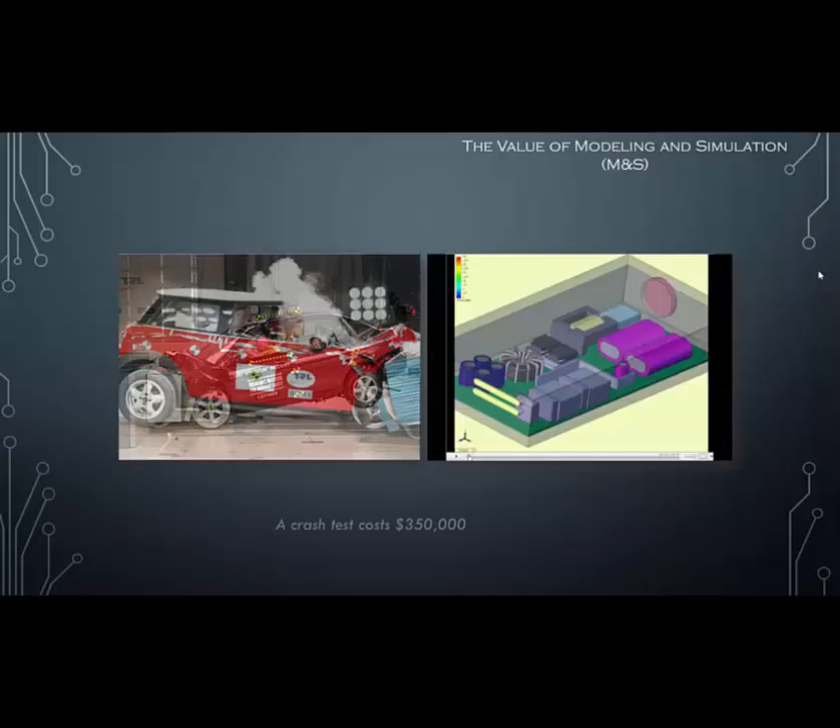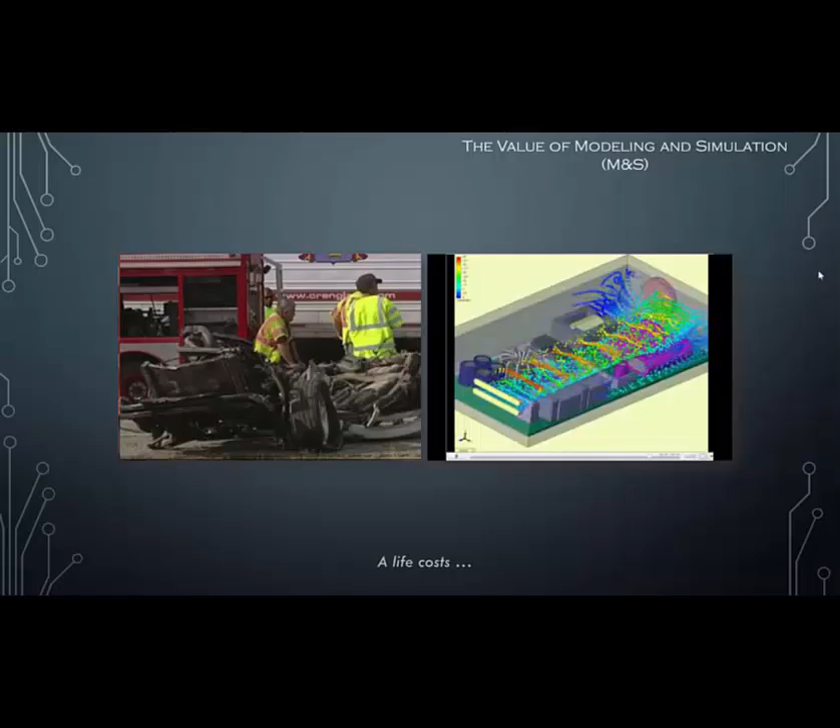And this applies to any kind of scenario, whether it be electromechanical, thermal, automotive, biomedical, or anything else. We want the ability to run trade-off analyses and vary parameters and see what happens.

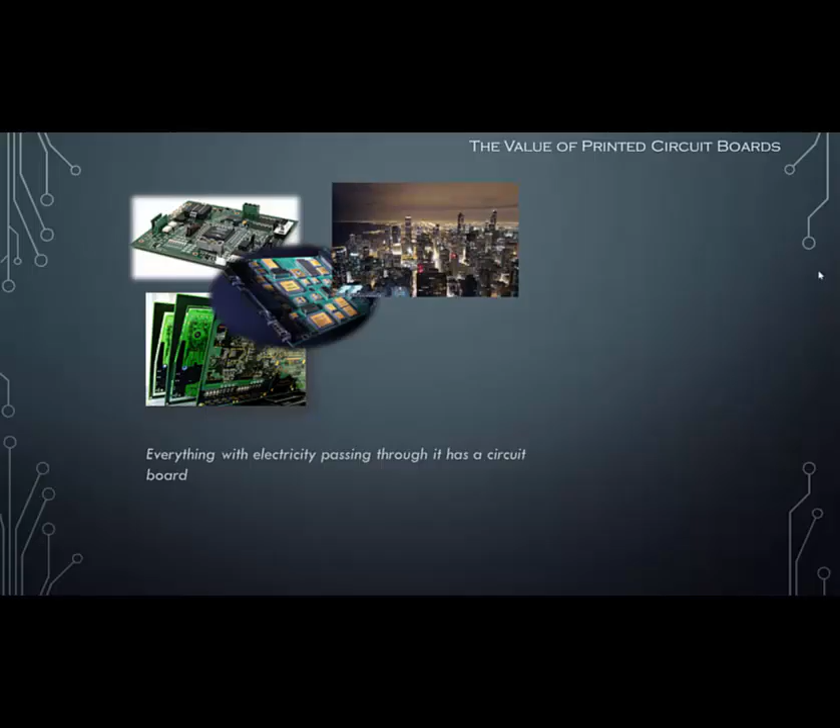Specifically with regards to electromechanical systems, anything with electricity running through it has a printed circuit board, so the market is very large, applications are broad, and often failure is not an option because you need very high reliability.

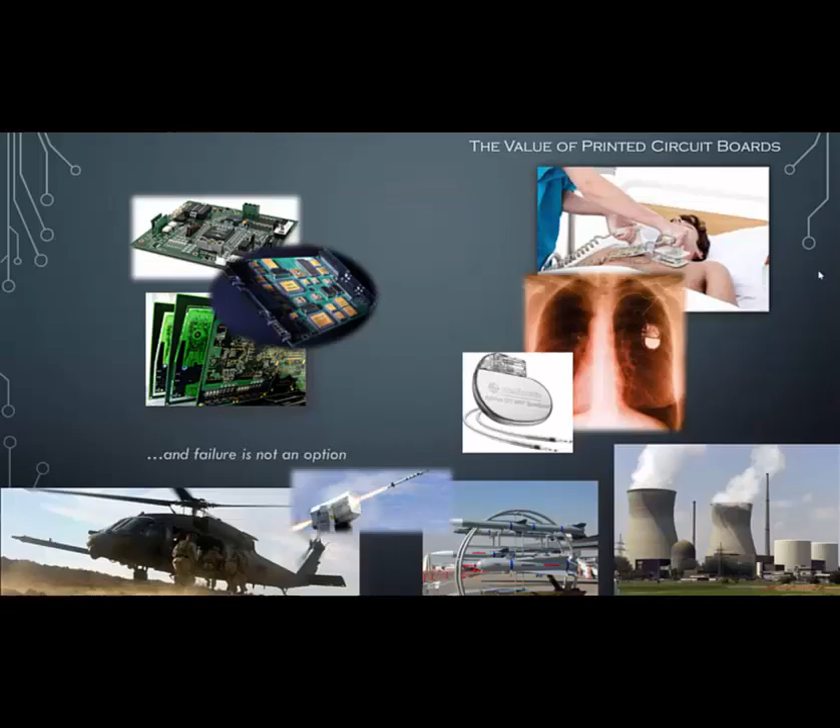In terms of use cases, $1 billion, anecdotally, is about what Microsoft spent on warranty costs for the Xbox because a small piece overheated due to a lack of communication with development partners.

In many large companies, you can have one person work on mechanical analysis, another electrical, another data processes, another thermal, and there's very little communication in terms of file formats or software packages. We want to solve those kinds of problems.

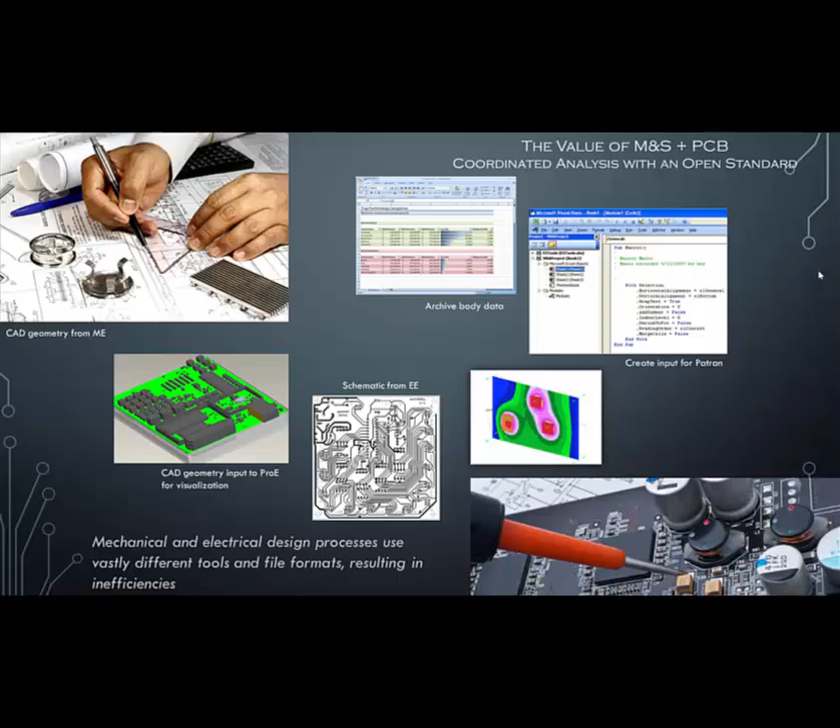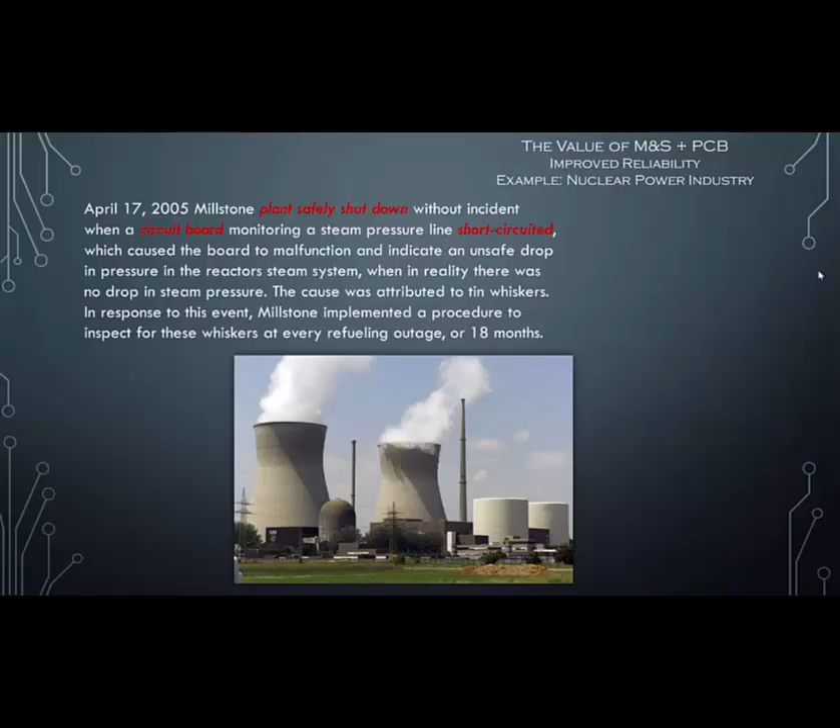In the nuclear industry, you can have circuit cards that are 20, 30 years old, and when they fail, there can be significant repercussions. So we're interested in developing capabilities that allow us to automatically reverse engineer those circuit boards, then virtually analyze them for reliability issues, so that if there is a problem, we can see it on the computer before we see it in the real world, and then we can address those issues.

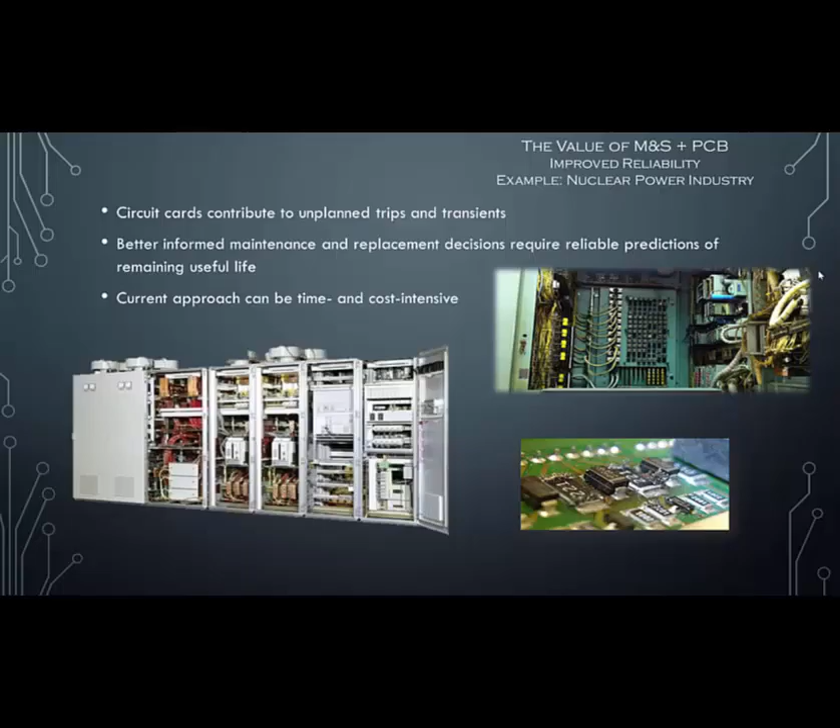The kinds of issues and the market and the problems that we want to solve are not just technical, but financial as well. Our hypothesis is that if we can provide a system integration software package that helps aggregate this data and these analyses, then through modeling and simulation we can solve those problems. We do it on 3 levels: analysis and testing, data, and visualization. That's what virtual system engineering targets, and that's what Preview does in general.

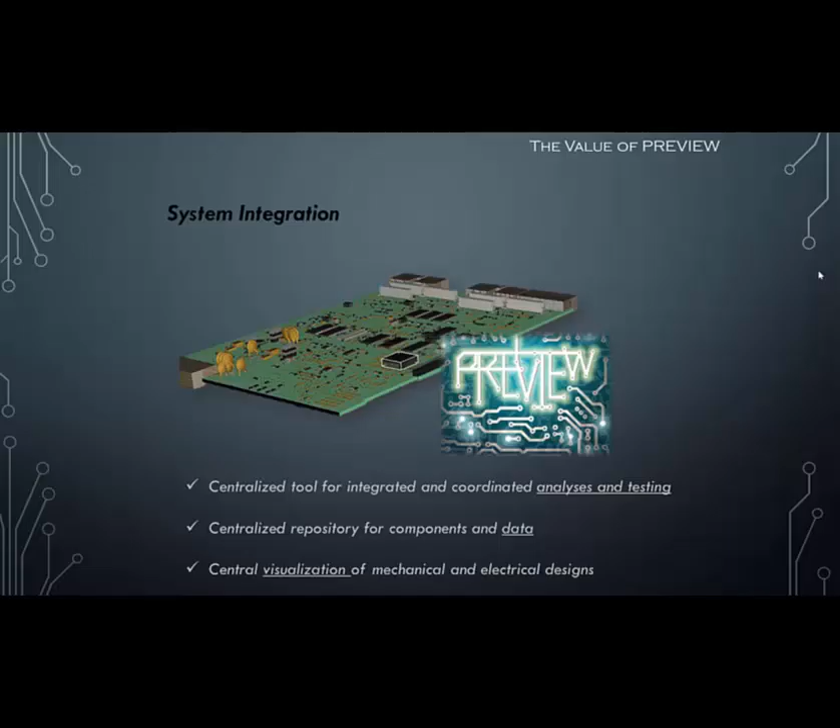Now we'll talk a little bit about capabilities for network traversal. The foundational capabilities for Preview involve visualization and manipulation of printed circuit cards in the various layers. One of the nice advantages is the ability to traverse networks on complex multi-layer boards, and that's what you're seeing here - the ability to highlight connectivity, contact different traces, different pads, and see how they coordinate throughout various layers.

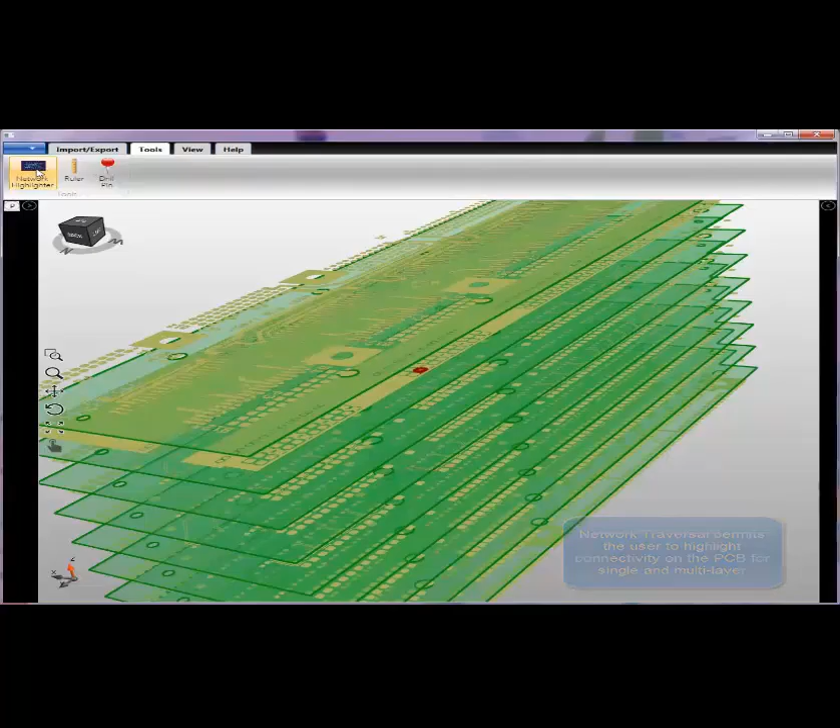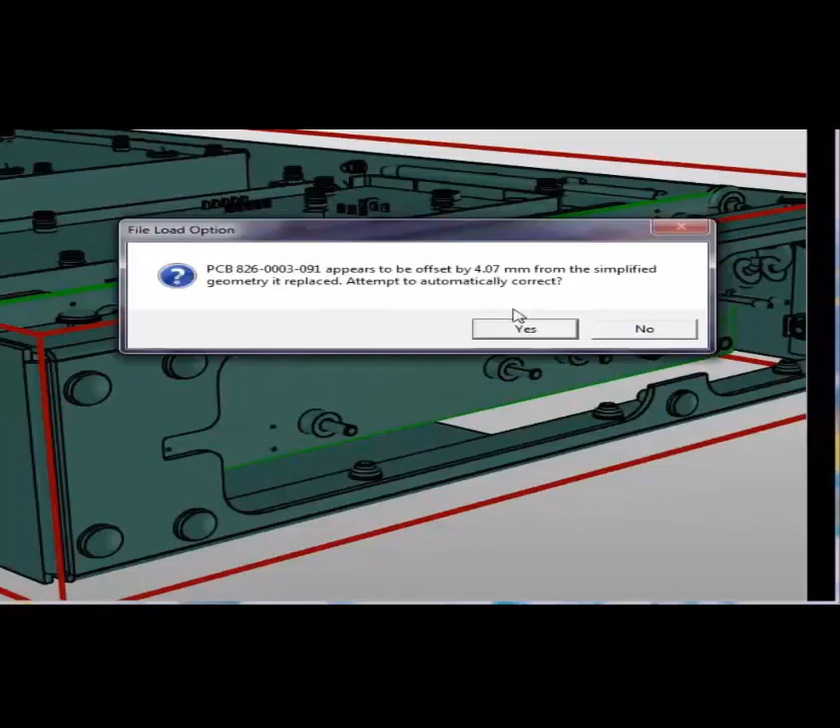We can also do what we call geometric analysis. This is essentially the comparison of MCAD, mechanical CAD, and ECAD, electrical CAD, where we automatically detect mismatches in this regard on the board level and on the pin level. We can do this for single boards or for multi-boards as well.

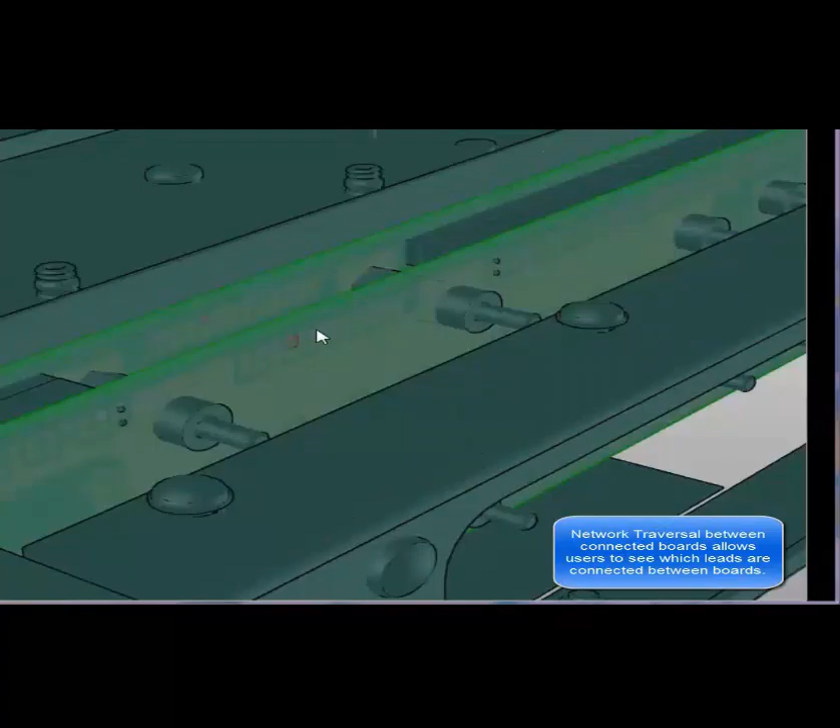Here you're seeing a case where the board was misaligned with the mechanical package. We automatically find that and allow the user to correct that issue simply by selecting a toggle. You also have the ability, another example here, to see network traversal between multiple boards, which is a unique capability.

This is the second example where you see in the schematic that the 0 point for the board is actually in a different place than the 0 point for the mechanical schematic. And it's very hard to detect this simply by looking at the drawings.

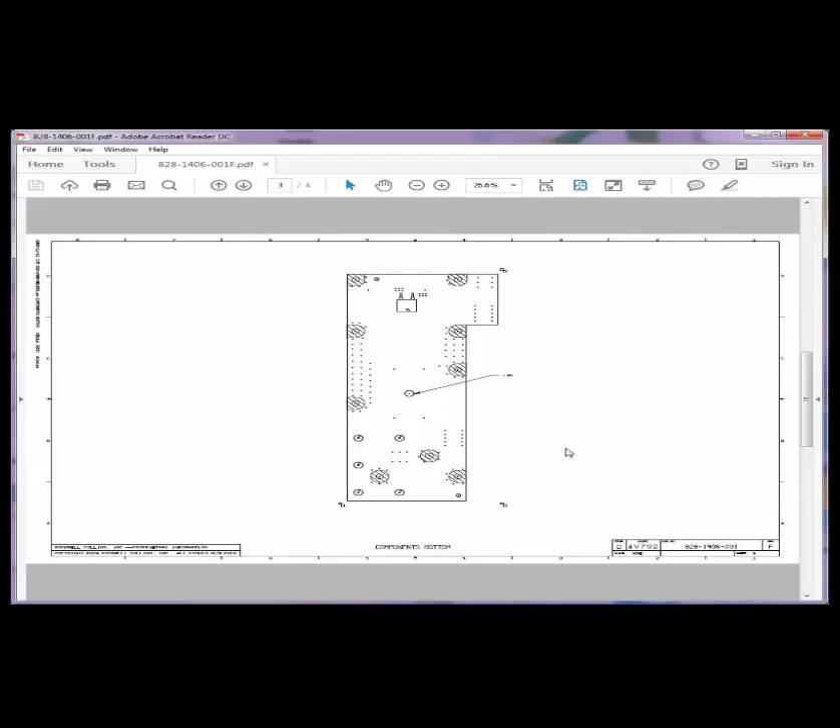However, it shows up immediately in a 3D visualization package like this using geometric analysis. Again, we automatically detect this. You can see that this offset is indicated by that white dot showing the 0 point. And we can again allow the user to correct this.

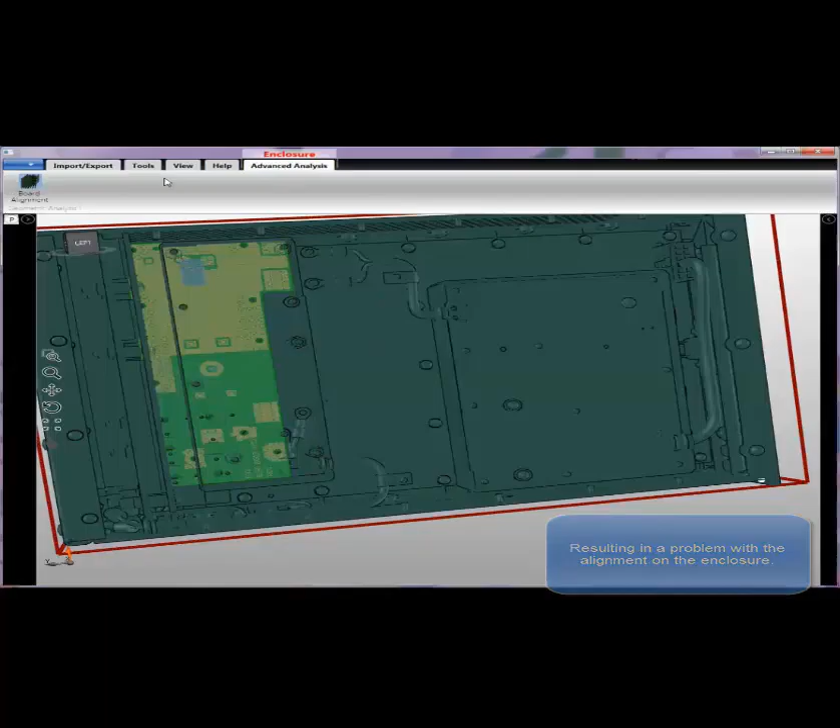We can do the same thing in terms of pin mismatch with components. We've automatically detected pins that are essentially open - they're not connected to the components.

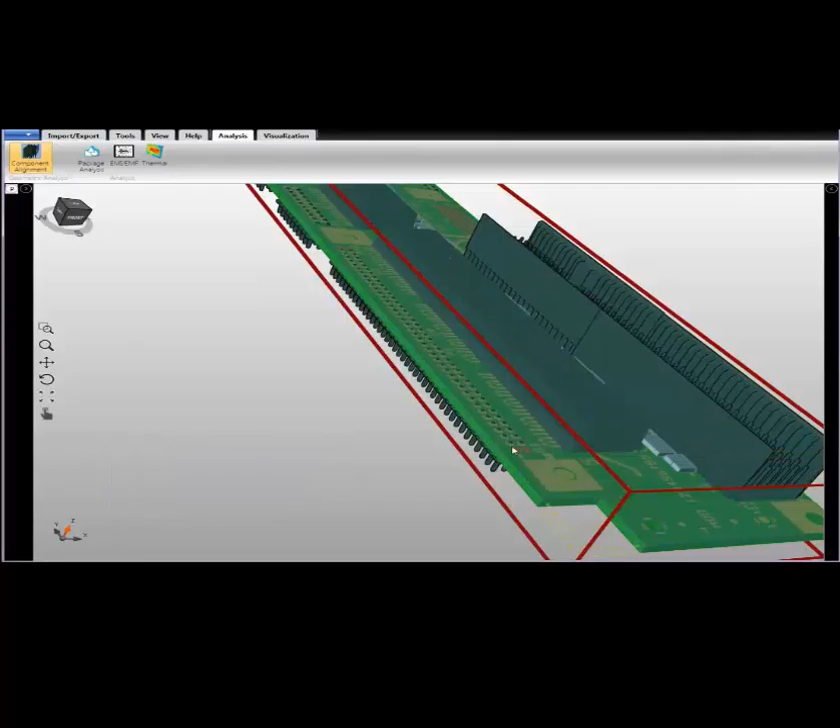Now what you can do is leverage our underlying component library, find the proper component, select that component, and just within the library manipulate it, visualize it, see what that component looks like, load it into the board. It automatically gets positioned in the proper place. And again, this mismatch between ECAD and MCAD, in this case traces, has been corrected.

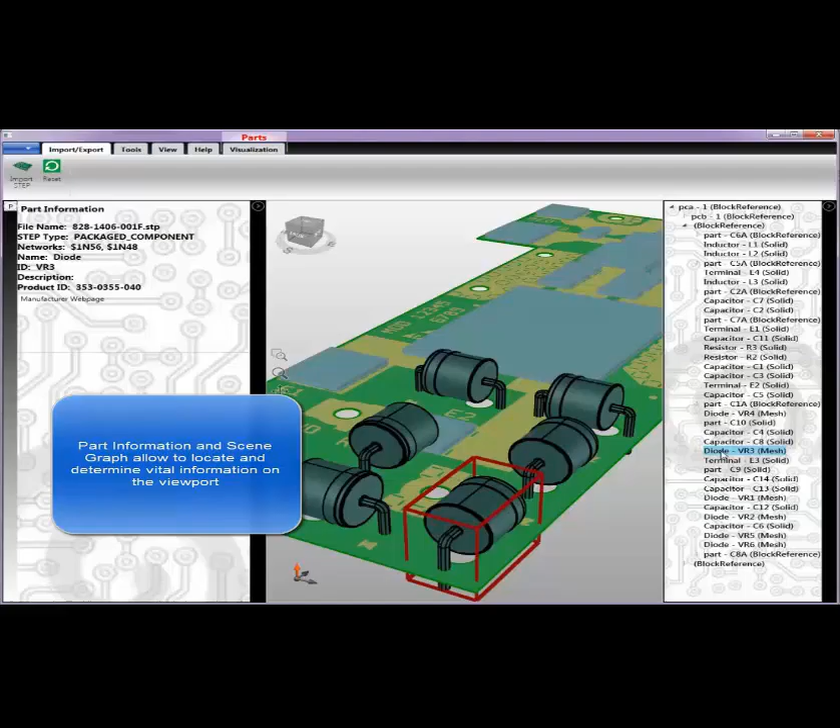We'll now talk a little bit about the ability to coordinate component data. What you see here on the right is what's called an open scene graph. It gives you a verbal and structural relationship between the different components that you see in the scene. So we coordinate between the visual aspect and the label on the right, and how that's parented to different geometric structures.

Concurrently, as you select a component, whether you select it visually or select its title on the far right, on the left you'll see all the information about that component.

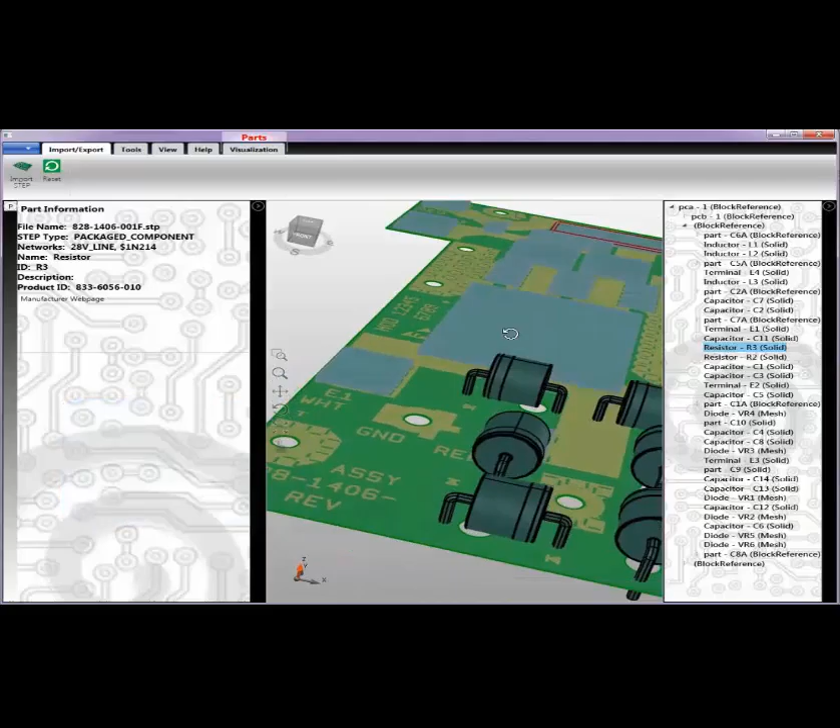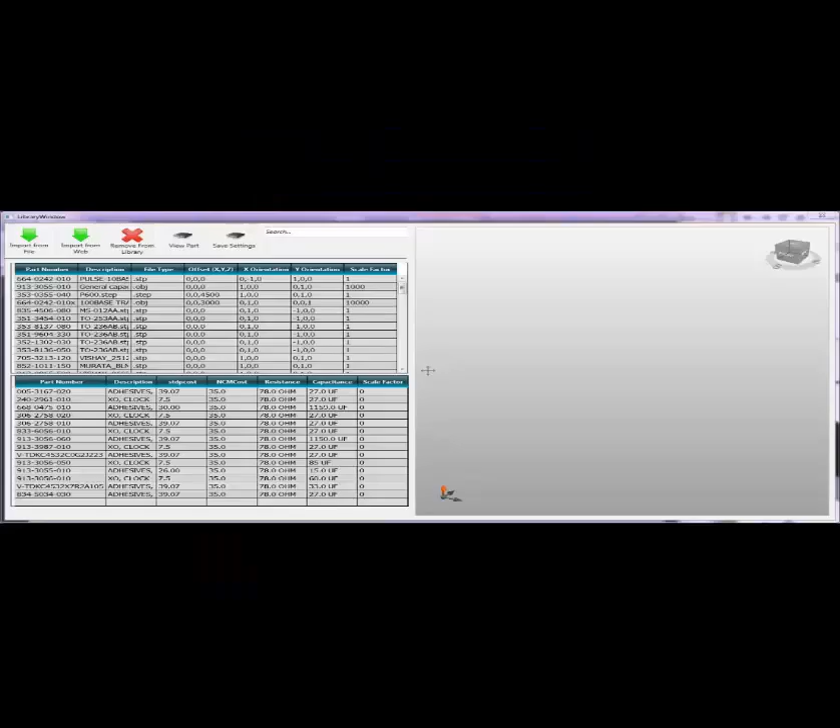Then, given that kind of database of component information and visual models, what we can do is scrape the web, scrape manufacturer web pages to extract their information and their components that are publicly available, and we can do that on a regular basis.

And here you're seeing the process you would go through to load in a new part. This can be automated, so it happens every week, every night. And then those components are stored within our library and can be used to replace components that may not meet necessary requirements.

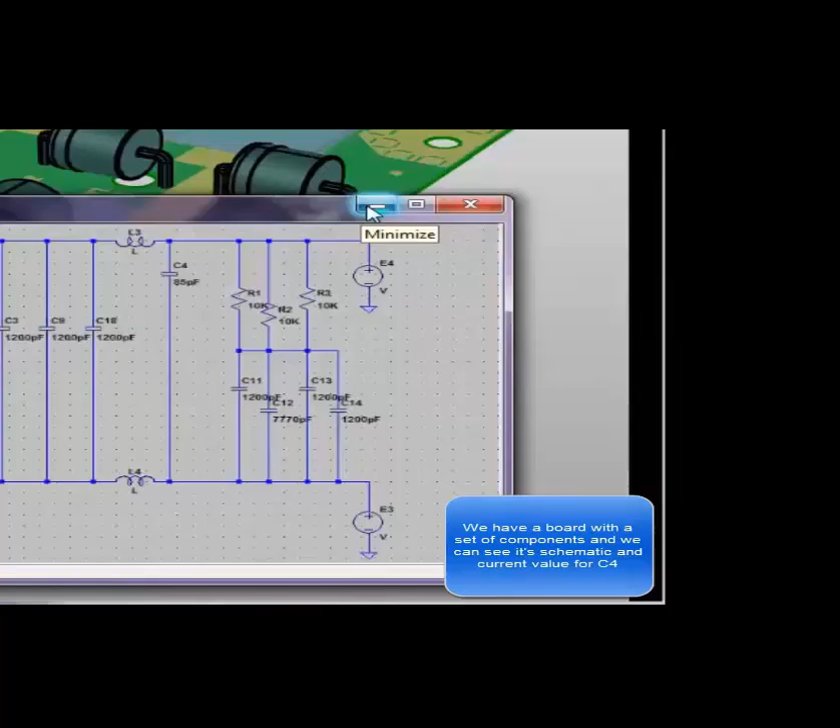So now, given the ability to visualize circuit cards, coordinate data, and coordinate component geometry, we're going to look at new capabilities for virtual test, where, as you've seen, we're able to create and display the schematic for a board. We can look at the performance of that board and plot that in various capacities, and in this example, we're not meeting a requirement.

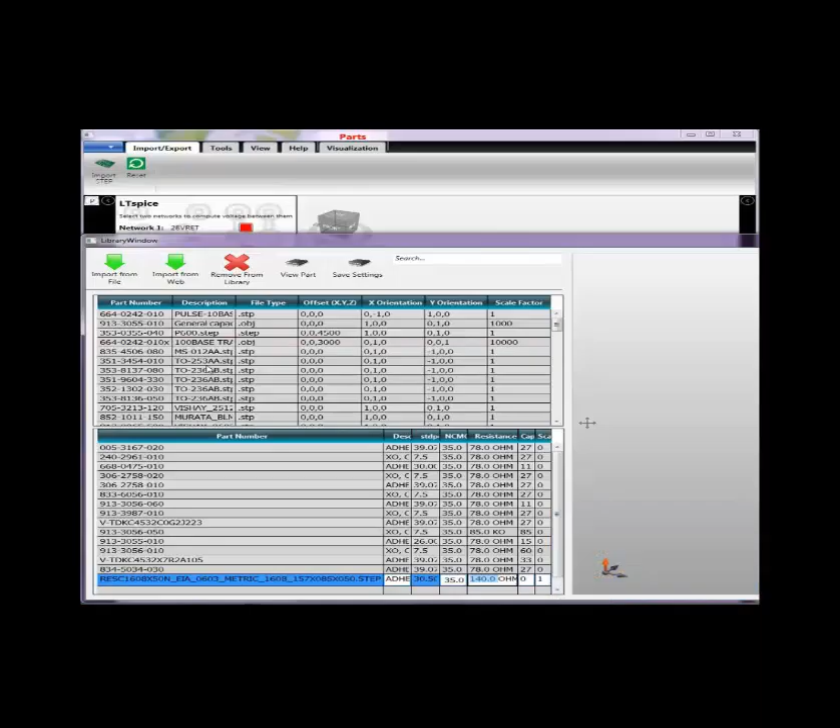So we can go into the library, find that part that we previously scraped off the web or obtained from a manufacturer, possibly a new component, load that into the board, and then we can rerun this analysis.

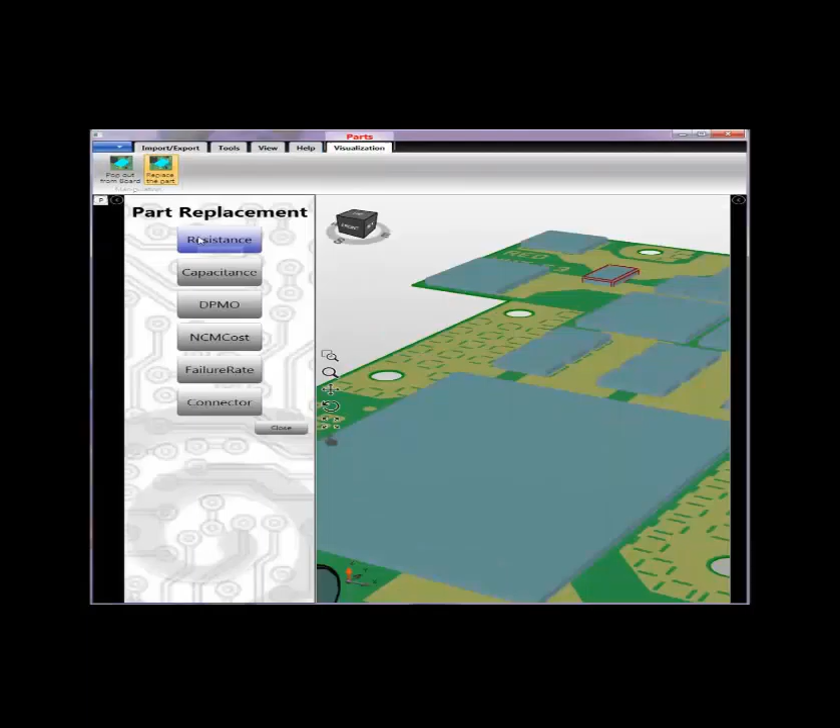We can see the update to the schematic file and how things have changed, and we can see the change in the part data, the part name, and then see how the performance changes.

So we reloaded the components, and you'll see that the details of that schematic have changed in terms of that component's characteristics.

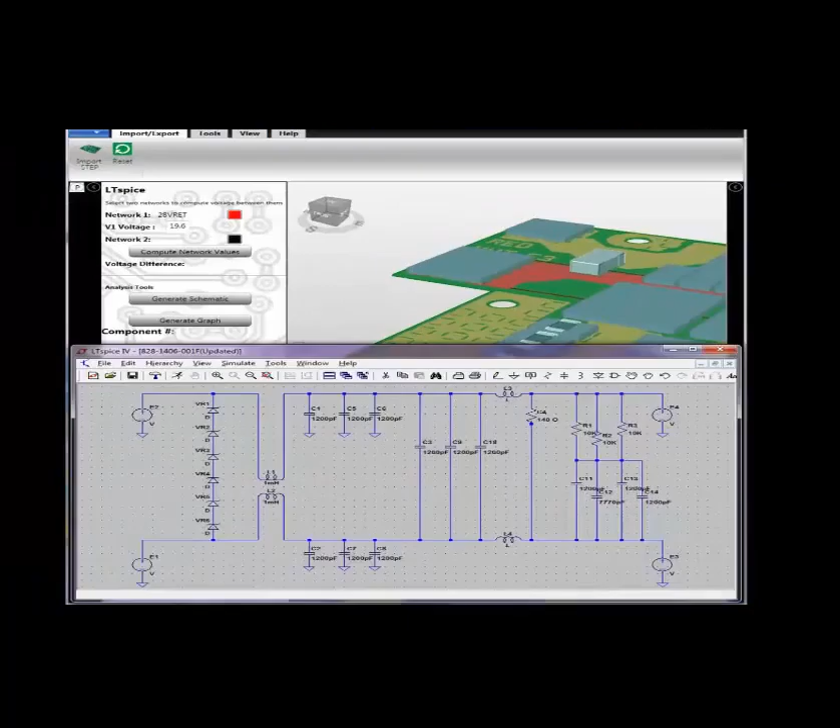And then when we look at the performance, in this example, now we're meeting the design criteria that have been set. So that should give you an idea of the new capabilities for Preview and what's going on in virtual systems engineering. Thank you.